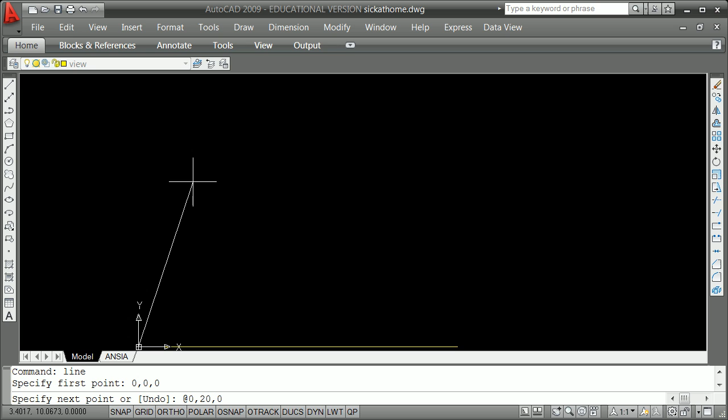0 in the x, and 20 in the y, and 0 in the z. So you're reestablishing in your brain right away that you can use polar coordinates by using less-thans to signal an angle, or commas to signal a Cartesian. This is the step of drafting a box bigger than the thing you're going to draft.

I'm going to hit an Apple Software Update and close that now.

So now, remember, escape, escape, escape, Z space, E space, and in all reality, my students tell me you don't even need to do the spaces in between, and roll out a little with your mouse. You're then trying to establish that you remember that lines have a given direction, and you do O for offset, T for through, and go click, select, and then shift right click, go to the endpoint. That's probably what you're going to do a lot.

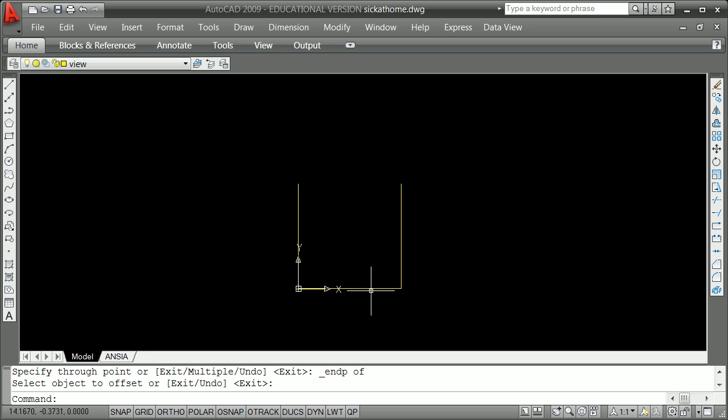On this second one, you might do it by distance again, though once something is on the drafting space, you're better off using throughs, as you'll see, in terms of a habit. So I'm going to now say offset, give it a distance of 20, return, select, and then just show something on the side. So I'm going to click up here.

Anywhere on that side, it will click it to the right spot. I'll continue talking about this one, but immediately saying minus V for view, W for window, and probably a good idea to type something like home as opposed to using plot view like I've done in the past. So home, it's asking me my first corner, shift right click from the endpoint of one, shift right click to the endpoint of the other.

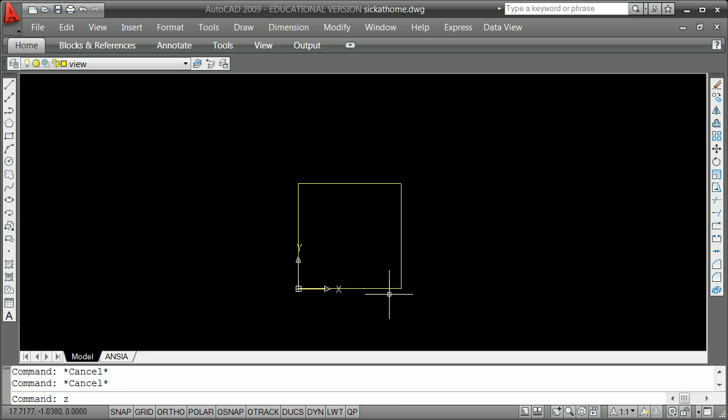And this will give you an ability to always go home when you want to go to that point. Escape, escape, escape, Z space, E space, and now you're ready to start drafting. You notice that everything there was put on a layer called view, and so we actually have some strong baselines we can now offset to do our work.

And I'm going to do now problem 1-2 by offset in real time. I will then show you how you could do it faster, but I want to get you to the point where you know that doing things by offset is probably the place to start. Less efficient in the short term, but much more useful when you get into reality in terms of things being parallel, and that being an important aspect of this.

So I'm going to do this now, O for offset. I'm going to offset with a distance of 2, and I'm going to offset this one here. What I'm doing is I'm grabbing the line and then clicking on one side or the other. F for fillet. If you want to learn to hold shift right away, it's a good habit. I'm holding the shift key where I click on these two.

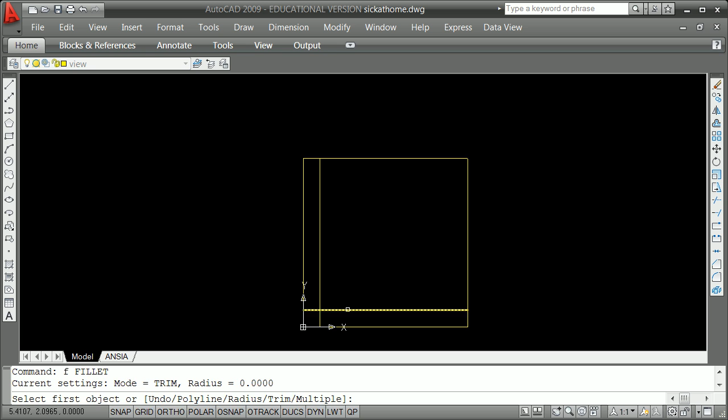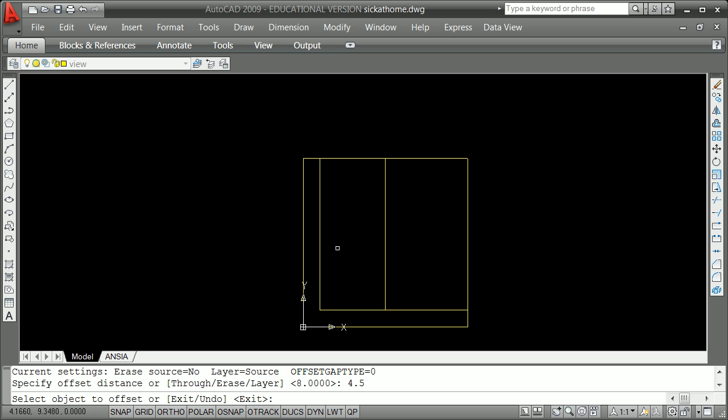And one of the ways to go about doing a lot of this drafting is to draft the whole bounding box. So I'm going to do that by saying O for offset, 8 for a distance across, holding and clicking here with a left click on one side, and then O with the bounding box being 4.5. Click on the line, and then F for fillet.

Click, click, space bar, left click, space bar, left click, left click.

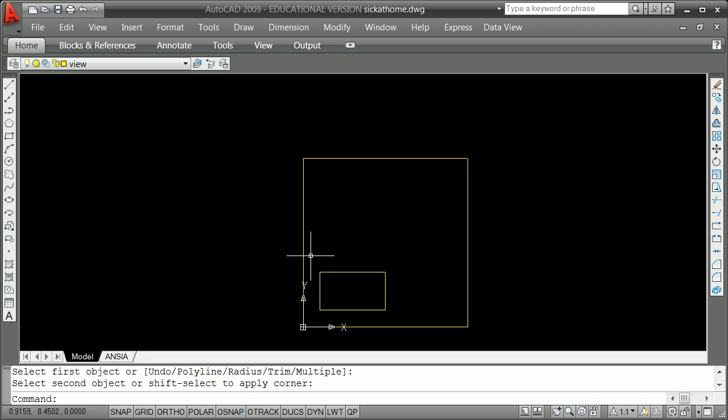At this point, many of you are going to want to continue drafting in the view, but remember that we can grab everything, so select everything, keep our mouse out here in the black space or on the white space, and right click, then change the properties to change the layer to something we're going to call object, which is going to be something we're going to draft a lot of things on. When it does that, you'll see I have a problem in that that layer gets lost.

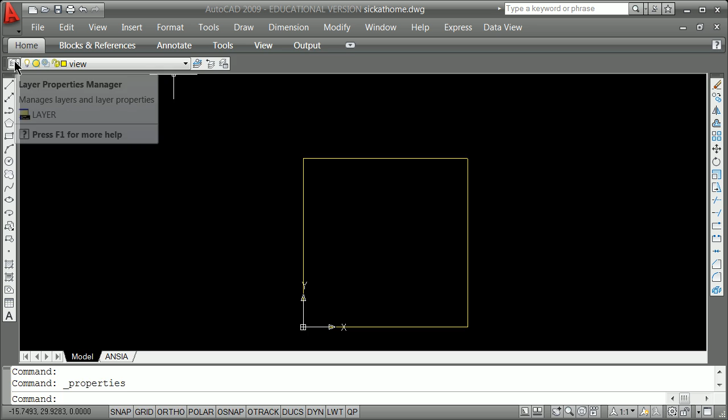Hopefully that's not set in yours. So realize very often one of the things we're going to immediately have to learn to do is go to Layer Properties Manager here and make sure that we don't have anything turned off.

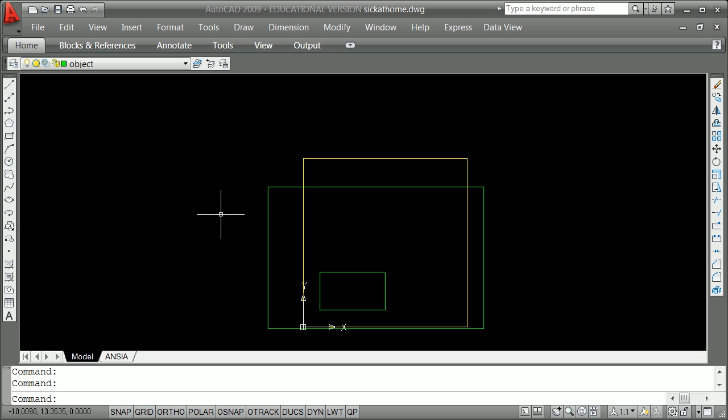I'm going to turn all those on, and we'll look for a key that'll do this a little bit easier for you. You want to be drafting on the right layer. If you're not, and you see something new came in, that's a box that's been clicking around - that was essentially a template. You can learn to say, I don't want something like that, or I can stick in another layer. So learn to grab on things and then hit the delete key or hit right click, erase.

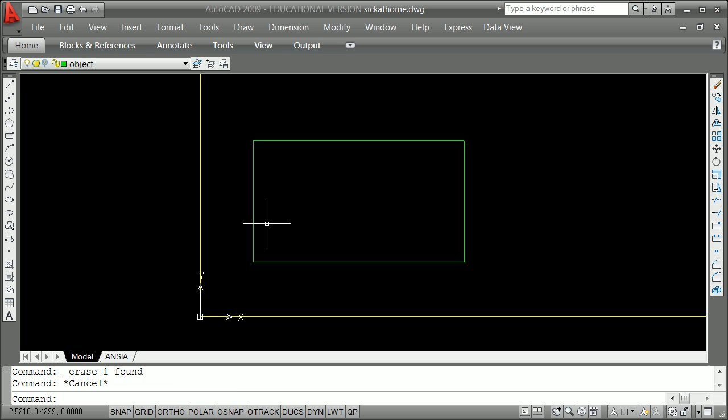That should do it, and you're back to dealing with the piece that you have, which can now be drafted by offset. So the rest of this will go fast. I'm going to go around clockwise with the offsets and the fillets. I could do all of them at once, but very often it's not a bad idea to do one at a time. O for offset. I'm going to offset that first one by subtraction, 0.75. So offset that one there, and then offset it 0.75.

Now remember talking about fillet. F spacebar. Spacebar remembers the fillet, and I am keeping the things I want to keep.

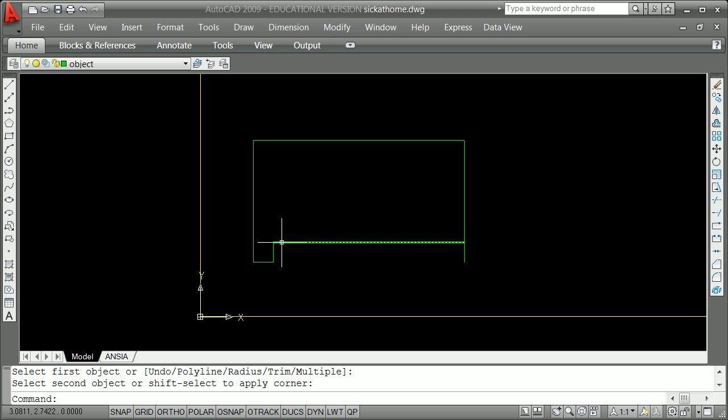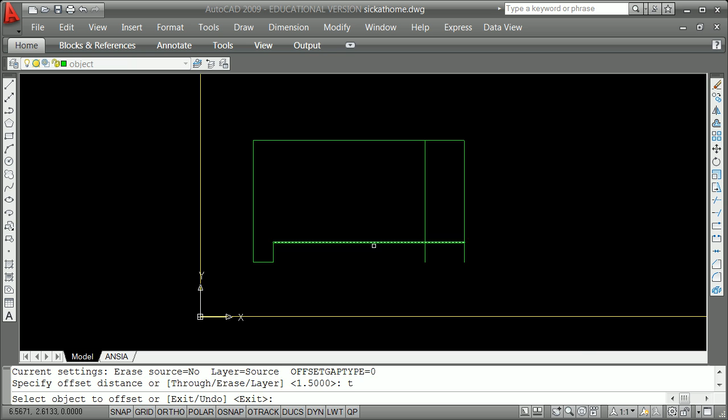On the other side, I can offset back. Offset O 1.5. Click on that and bring it back. Now remember this one as well, right? You can offset back through, and we'll talk eventually about breaks, but offset. T for through. Click on that. Shift right click and point there, and now you have something you can do what?

Fillet, select, spacebar, select. You now have the back bottom piece done.

You can now come back across the top. That first one, working from left to right or right to left - I said I would go in a clockwise direction, that's a reasonable thing. I'm going to offset. It would appear by subtraction, 0.75, offset 0.75.

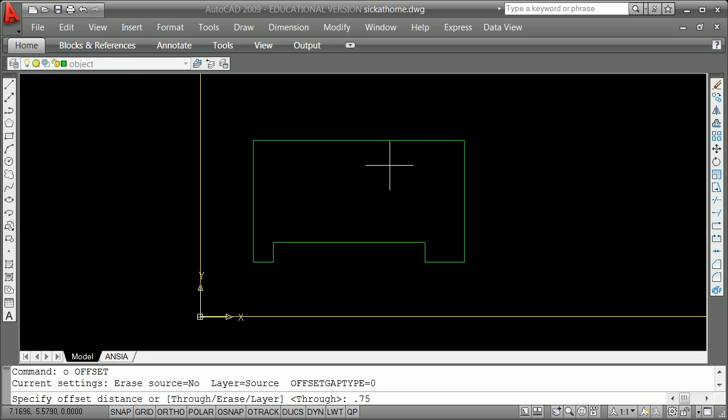Click on the select and then click anywhere on the side that you want it to go. It's showing you, you're giving it a hint. And then offset 0.5 coming back down. Remembering once again, F for fillet, select what you want to keep. Select what you want to keep, and you can keep going from there.

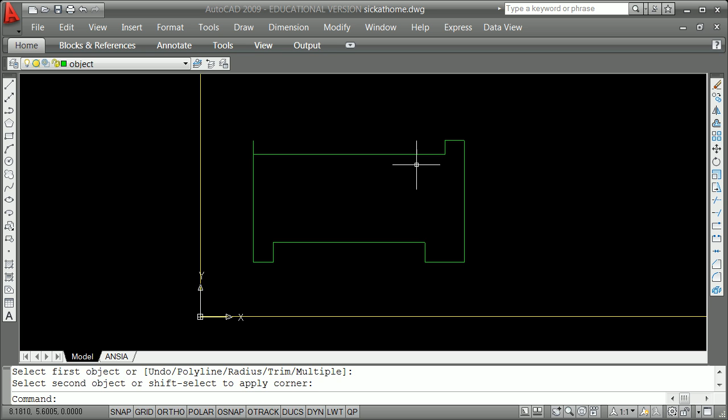It's a great idea to learn to offset all the way from the baseline if you can. That next one would be, in fact, what would have been 0.75 plus 0.75, so it would be 1.5. Offset 1.5. Select here, going across, and then offset down if you would. From that line there, you're going to offset down, it looks like 0.5. Offset 0.5.

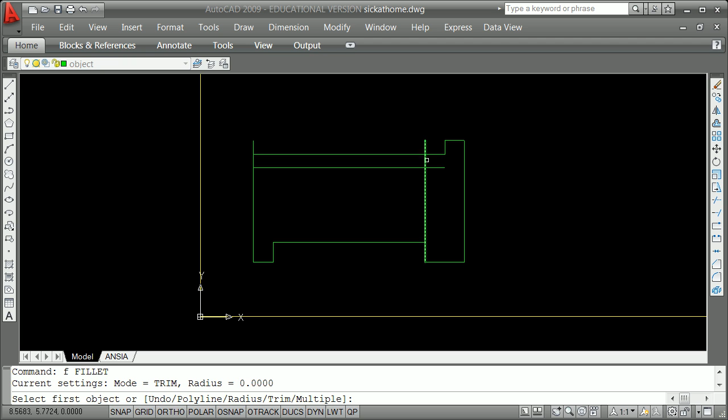Once again, F for fillet. Select, spacebar, select. You're making your way down. You can once again, not necessarily offset from the very edge there. Now you could just perhaps offset 1. O for offset, 1 for distance. Offset this short little line.

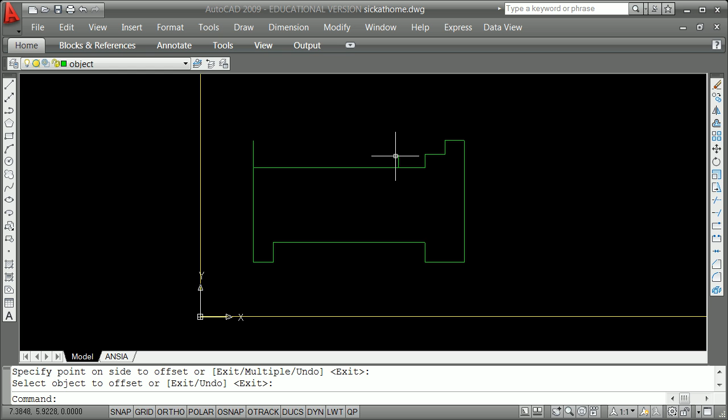That next one down is a little bit tough to see. You have to look at the subtraction and the like. But you would like to go down, it looks like, mathematically, you'd like to go down the full depth, which is 4.5 minus 1.75. And so you hang around with a calculator - 1.75, 2.75, 3.75. You want to go down 2.75 more, offset 2.75. At this point, I'm going to stop.

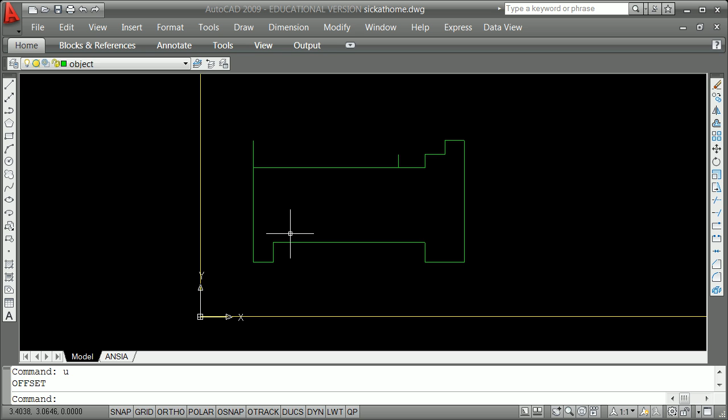I did it obviously wrong. You're using visual checks. O, U for undo. Very often you might want to reestablish a line, or you might want to establish a line back up this way. So we can offset that line from the bottom. Offset 1.75.

Establish this one. This starts to let you know that you can say F for fillet, and it will grab and lengthen lines as well as shorten them. So you can then do F for fillet, select. Escape if things don't work. F for fillet, select, which is that left mouse button.

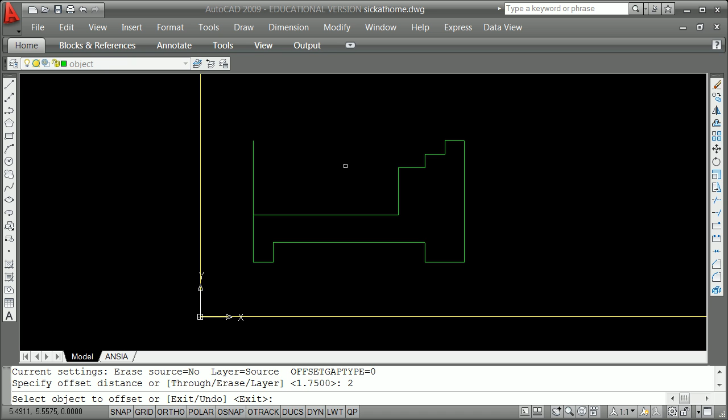You now go across 2, offset 2. From there to there. You now are going to go up 0.75, offset 0.75.

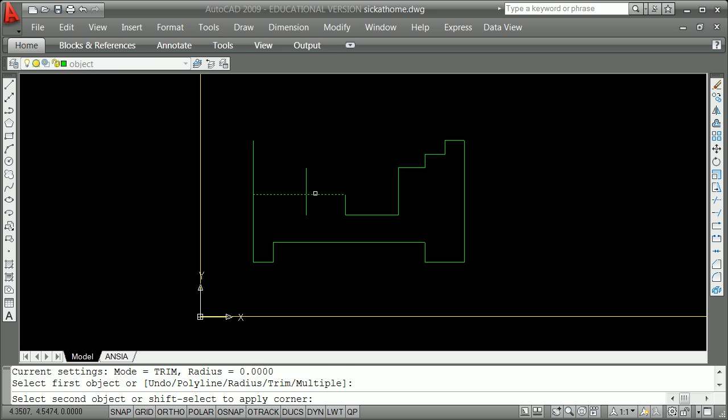Select up on top, F for fillet, select what you want to keep. You're going to offset 1.5, offset 1.5. F for fillet, select, spacebar, select. You're almost there. Now you're going to offset 0.75 this way, offset 0.75 this way. And now you're back to knowing that you want to come down 0.5.

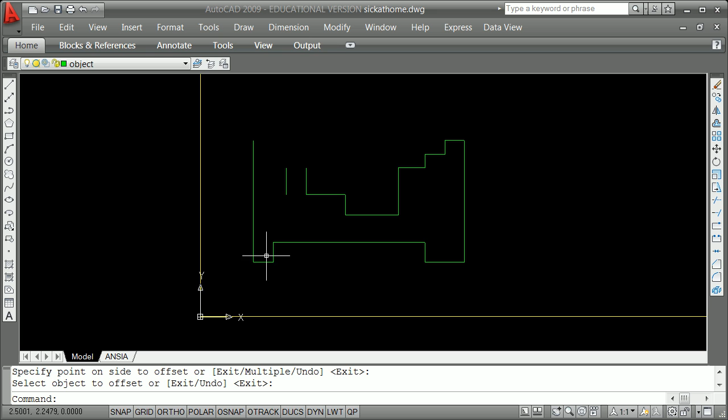In all reality, you could draw another line from there, offset this one up. You're going to see there's all kinds of different ways, so I'm going to go ahead and offset this one up 4. Offset 4. O spacebar, 4 for distance, from there to there. You came down, up, fillet, radius 0.

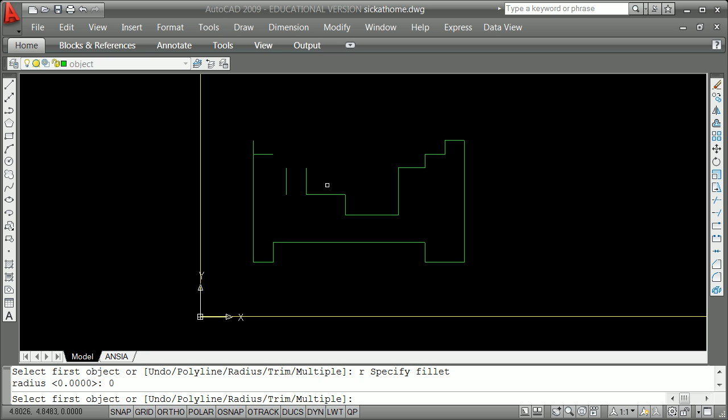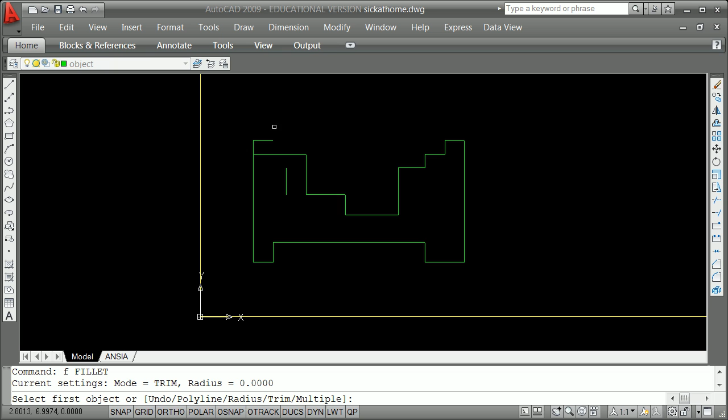And you're finally left with this last little tweak here. This one, O for offset, T for through. From there to the end point there. Fillet. Holding the shift key or not, because the radius has always been set to 0. Space bar for fillet. And you have the piece done.

Now, that is harder, longer, different than the way I'll show in the next video, which you'll see will be much quicker. But what you've done there, you've established something that's going to be parallel.

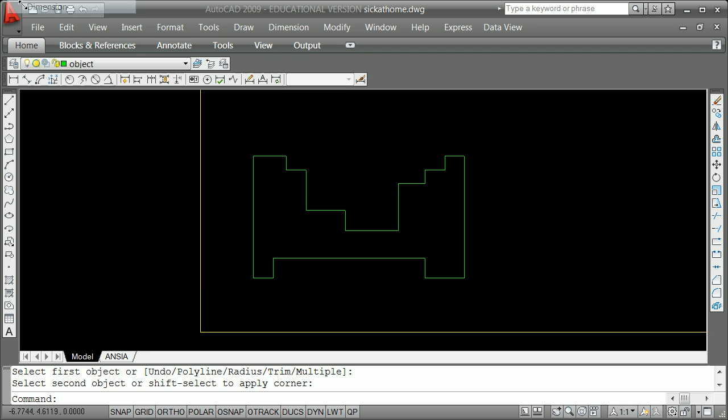One thing it's nice to do, we'll do it early in class, is to right away learn to go right click, bring up dimensions, right? And just to put one dimension on is all we want to really learn to start to do, and it won't always work, but in dimensions we're going to learn to not grab the first one, which is linear, but the aligned, and then shift right click to grab the endpoint of one, and shift right click to grab the endpoint of another, and pull that down.

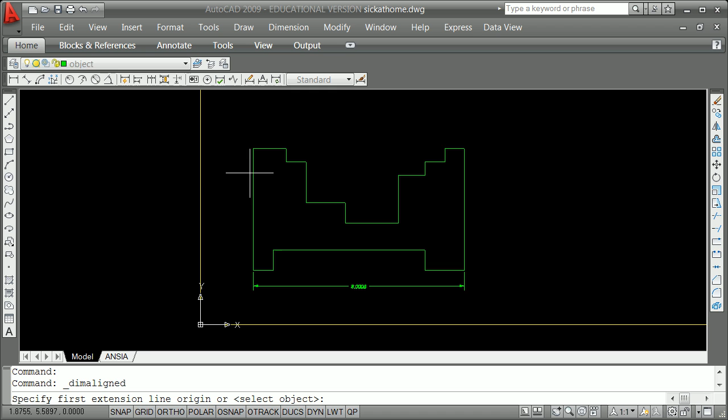And then to do one other dimension going up, click shift right click the endpoint of here, shift right click the endpoint of there, and you'll notice there why it gets screwed up, because these don't always grab what you want to grab. So you want to be aware of something called visual cues. So the little nuances, sometimes they're good, sometimes they're not.

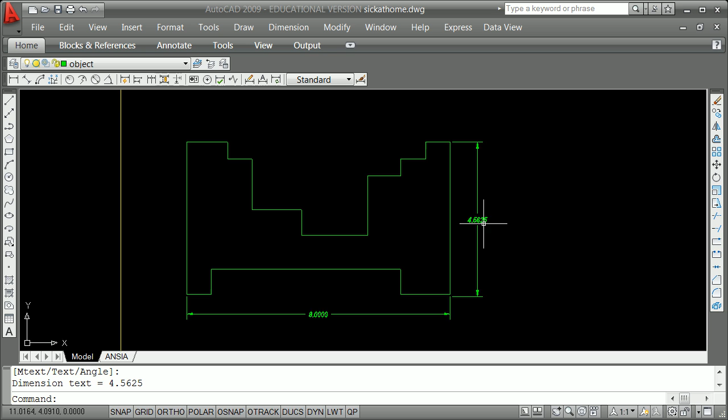So I can then go ahead and right click, erase something, and try it again. This time I don't necessarily have to grab, because it's one long line, the endpoints. I can hit a space bar, select the object, and pull that out.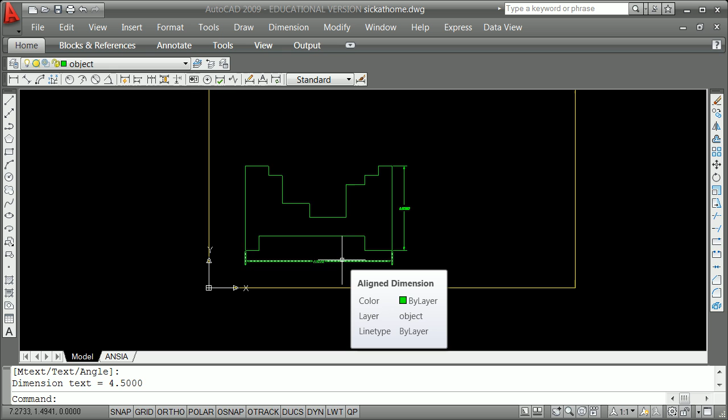Wheeling out, it's then finally a good idea to get the habit of that you can select, left select, go right click properties, change the properties to the layer. We're dealing with these colors by something called layer, putting it on the correct layer, and you're a long ways down the road to doing that.

I know this is quote unquote harder than the way that I'll show you, but establishing the offset as a rule for both perpendicular and parallel lines will help you later when a lot of your offsets are things like soffits or windows or things that are not just up and down.

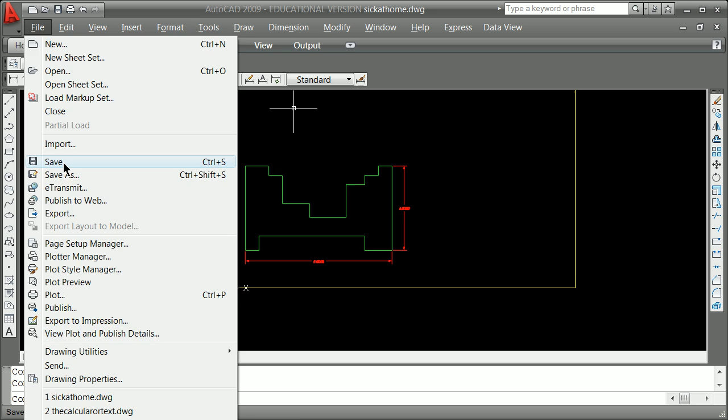Remember then to file. Once you did the file save as, you do a save. And for those now, that's largely done.

Later on we'll talk about how you can plot, but let's then review one of the skills you know, which is that you can grab things, and then with the select, and then left click over some logical spinny or scale or something point and spacebar through. Move, you might want to move that to a particular spot.

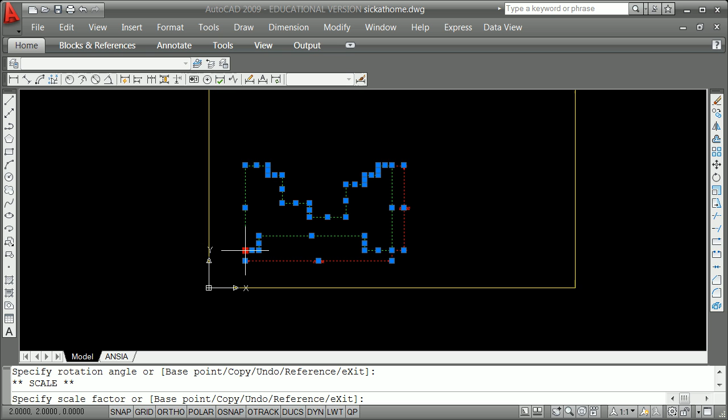You might want to move it, you might want to rotate it, you might want to scale it, not too often. You'll realize once you start drafting exactly, the scaling is not something you're going to do a lot. We did it the first time. You're more likely to have to scale things when you put them in inches and you wanted to put them in feet. So go all the way around from mirror, stretch.

I'm just going to go to the point of rotate, and I'm just going to give it a rotation angle right now of 1 hour's time, which is 15 degrees, and you see how it rotates and everything works. So try that and see how you do.

Remember the skills that we have. We're trying to push offset. We're trying to draw a box bigger than the thing that we have, and we're trying to use fillet, radius 0 a lot. If you can do the habit of holding the shift key while you select and fillet, it will help to develop a habit through. Shift right click for end snaps.